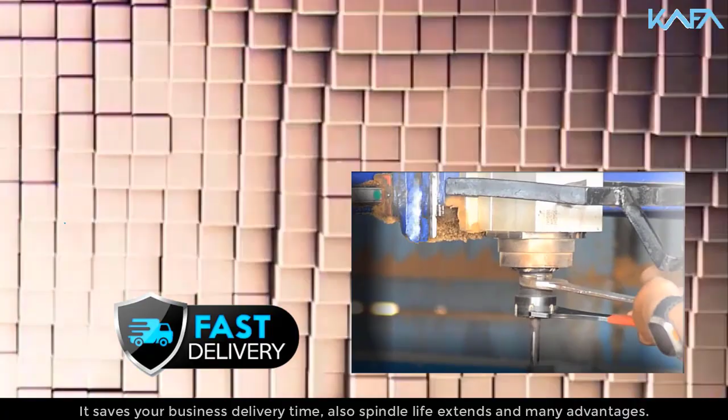It saves your business delivery time. Also, spindle life extends, and there are many advantages. Let's see practically what it is, and next, how to do multi-table work.

Suppose you ran a big, lengthy design, and now you have another emergency to finish a relatively small design. Don't worry about it. You can simply run beside that workpiece without changing the origin. This is an example of multi-table work.

Another example: if you want to design a dip stripping door, you have to make designs for all unique sizes, and each design requires a rough surface and finishing cutter. So you have to change the cutter 4 times for this door. But if you use multi-table work, changing it 2 times is enough.

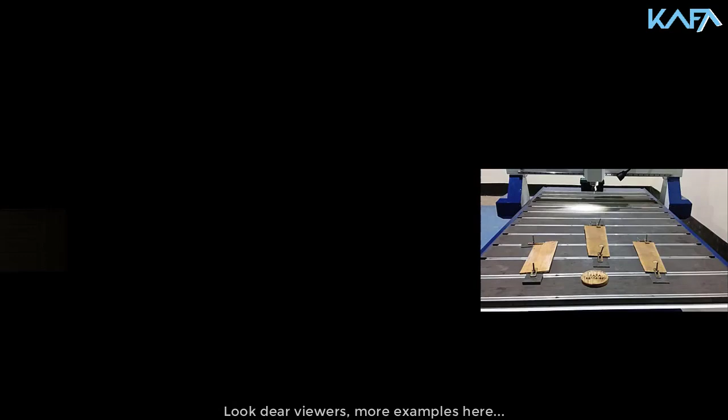Look, dear viewers, more examples here. Dear viewers, please give extra attention now.

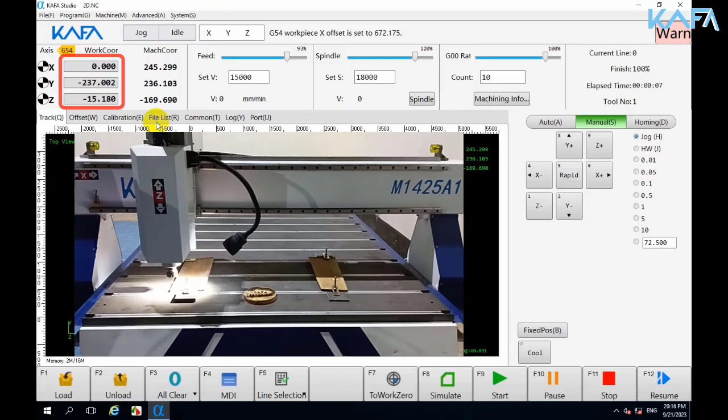Set the first workpiece origin. Click on the Machine menu, then Coordinate Backup. Then save the current origin point.

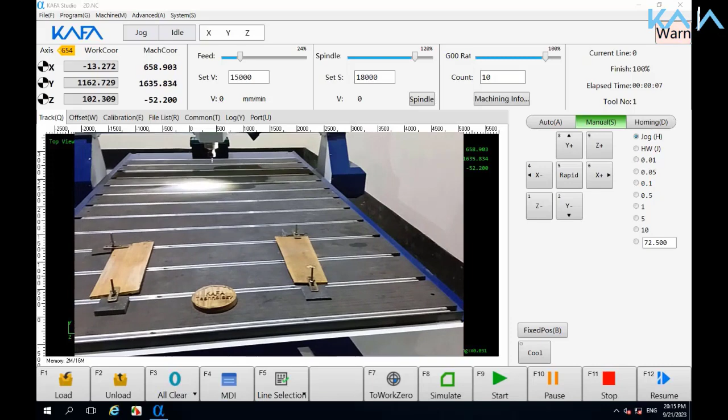Now move to the second workpiece and set the origin. Then save the current origin point in the second line.

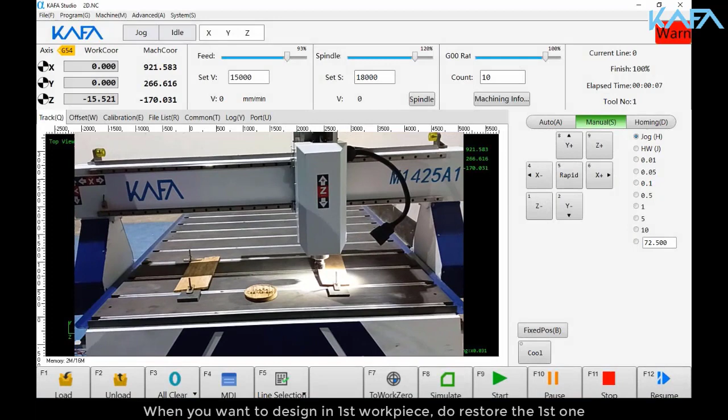Now it's time to design. When you want to design in the first workpiece, restore the first one. Now press F7. The machine head will come to the first origin.

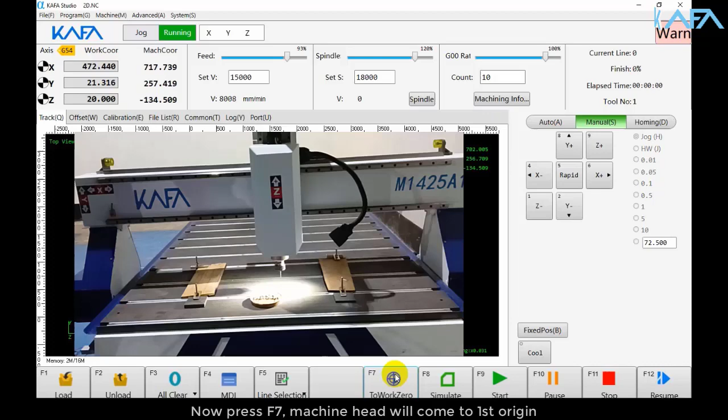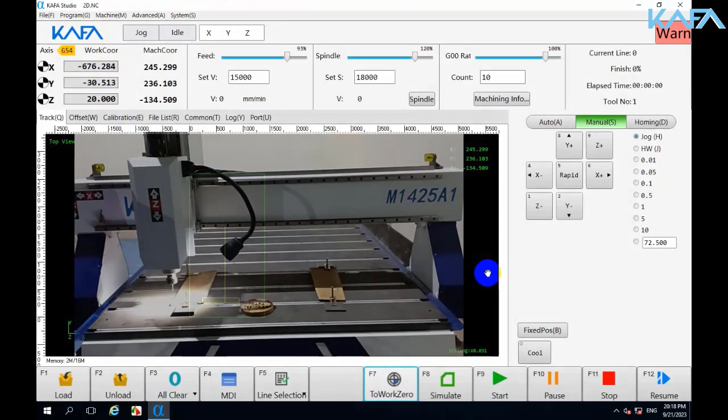And for the second workpiece, restore the second one. Now press F7. The machine head will come to the second origin.

If you want to replace old saved origin data, simply set the origin, then save and overwrite the old data.